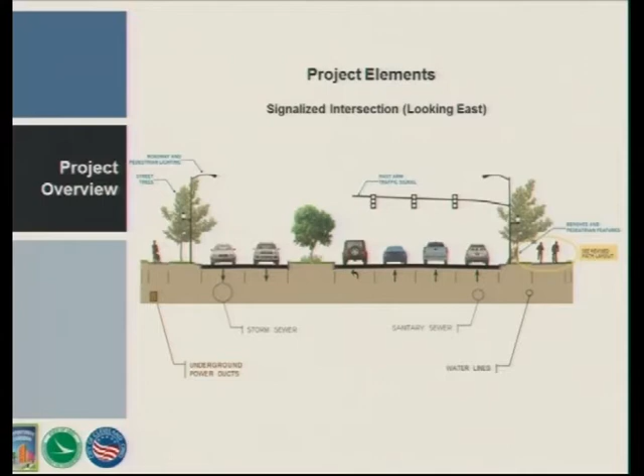So as we look at the road, it was mentioned as some people view it as an extension of the freeway system. As we've always stated, it is not a freeway. It is an at-grade boulevard, so it has traffic lights at intersections, vehicle lanes, sidewalks, bike facilities, grass median, tree lawns, street trees, and lighting. Underground, the roadway is also making accommodations for underground power distribution systems, storm sewers, sanitary sewers, and water lines, all the things that will be necessary to support the redevelopment.

A recent change, there's been a lot of talk about that bike facility. The project started with bike lanes. It eventually shifted to an off-street, shared-use, multi-purpose trail, and then it's been refined within the last month to be a segregated bike and pedestrian path where they're separate from the roadway and still remaining separate for safety. There will be 2 bike lanes on the south side of the road adjacent to a sidewalk, so pedestrians and bicycles don't share the same facility, but they're now adjacent.

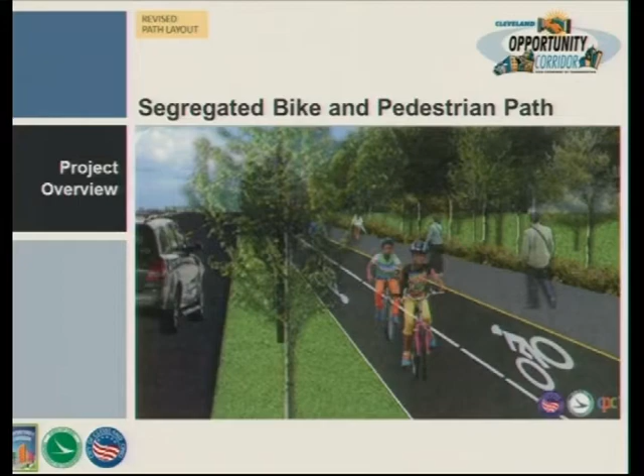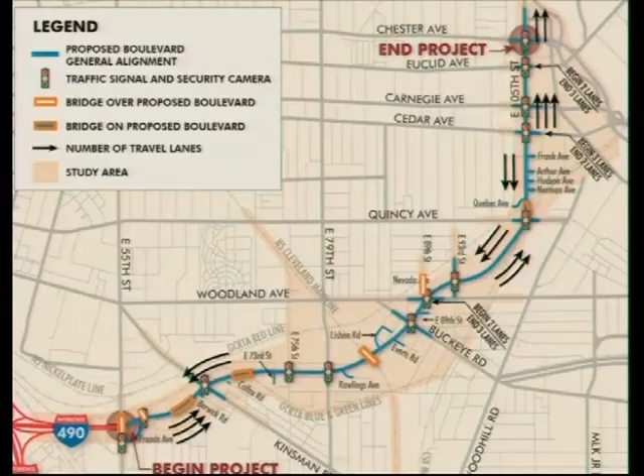This is a rough look at the alignment of the road, starting at the left. At the bottom is where 490 intersects with East 55th Street. The project traverses in a northeasterly direction, as mentioned, until you hit 105th Street and Quincy, and then it reconstructs and improves 105th Street all the way up to just north of Chester. There are 13 traffic signals that provide access into the neighborhoods, and there are 8 bridges. So when you hear bridges, you think, oh, it's all elevated, it's grade separated. That is not the case. 6 of those bridges are actually where the road crosses railroads, so a lot of it is separating the railroads from the cars and the bikes. At the west end of the project is the only place where there are roadway separations, and that's at East 55th Street.

Taking a look at East 55th Street, it will stay right at the same elevation it is today. Where I-490 comes in, it will be lowered, converted from what looks like a freeway into a boulevard, introducing medians and trees. It'll go underneath East 55th Street, with a traffic signal and access roadway providing access back to East 55th Street.

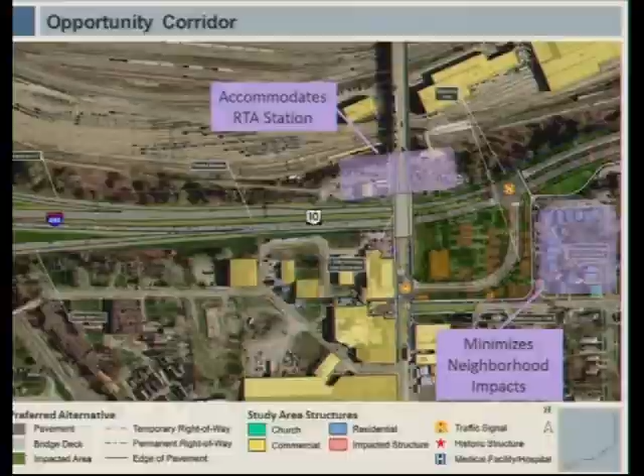This is because at the west end of the project we have very high traffic volumes, all the traffic coming off of 490 at 55th Street. In order to safely accommodate that traffic as well as pedestrian crossings going to the train station, we grade separated this location. There's also a pedestrian bridge right in this vicinity, providing direct access to the train station.

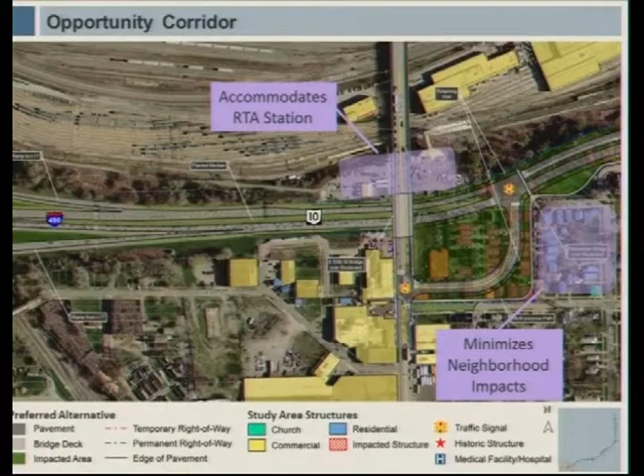Our primary constraints here are making sure we could accommodate RTA, not impact their substation or their new train station at 55th Street, while trying to minimize all the impacts in the St. Hyacinth neighborhood of Slavic Village.

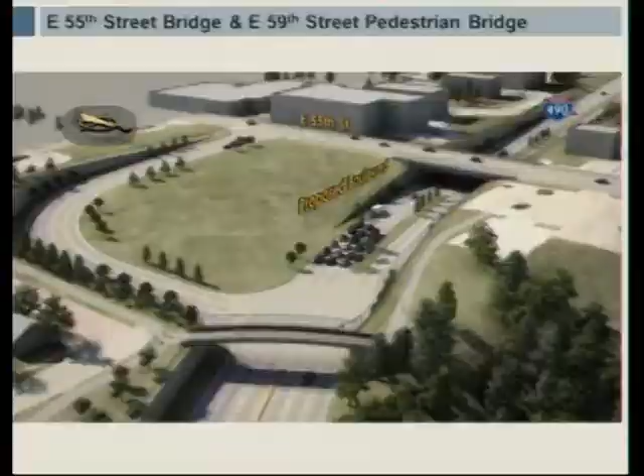This is a 3D rendering looking west, showing 490 depressing below 55th Street, and the access roadway that starts at 55th Street and wraps down, as well as the pedestrian bridge. Don't picture a pedestrian bridge elevated up in the sky going over—the pedestrian bridge is at neighborhood level and the roadway is actually below grade.

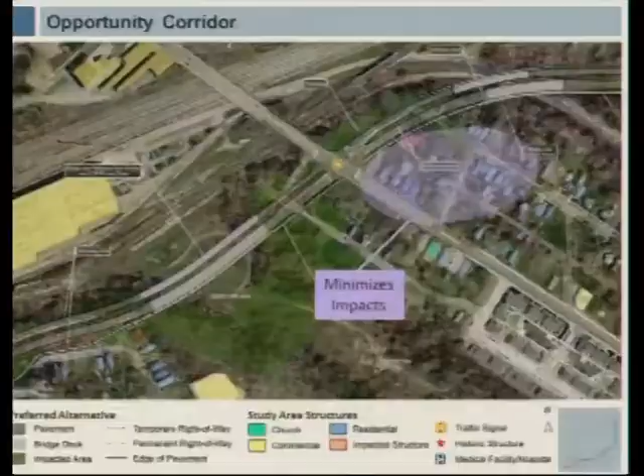Going east from there, you'll see our second set of bridges—about a 600-foot long bridge crossing of the Kingsbury Run Valley, about a 50-foot deep ravine. It presently prevents pedestrians, cyclists, or vehicles from moving through this area, so a new bridge is constructed there, along with a signalized intersection at Kinsman Road.

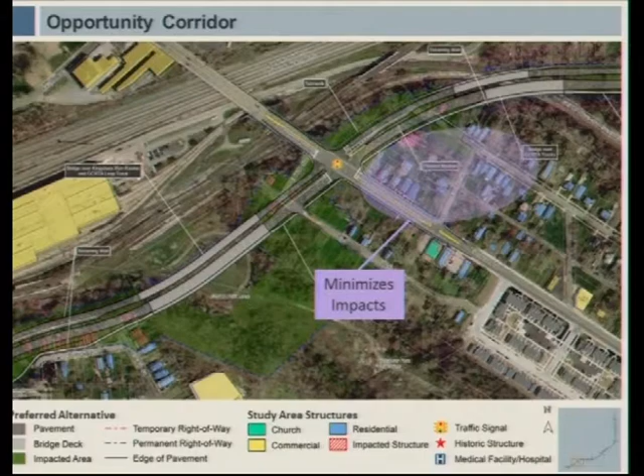Kinsman gets widened from 4 lanes to 5 lanes to provide a left turn lane onto the boulevard. Then we proceed east with another pair of bridges over the RTA blue-green lines, another barrier that prevents pedestrians, cars, and bicyclists in the area today. Our desire here was to keep the road as close to the tracks as possible to minimize impacts in the central neighborhood, the Kinsman neighborhood.

Moving east, you'll see a new signalized intersection at East 75th Street, and another at East 79th Street. To the north, the big yellow building is Orlando Baking Company. The alignment of the road has been coordinated to facilitate a multi-phase expansion of their property, as well as accommodations for the brownfield redevelopment area south of the boulevard.

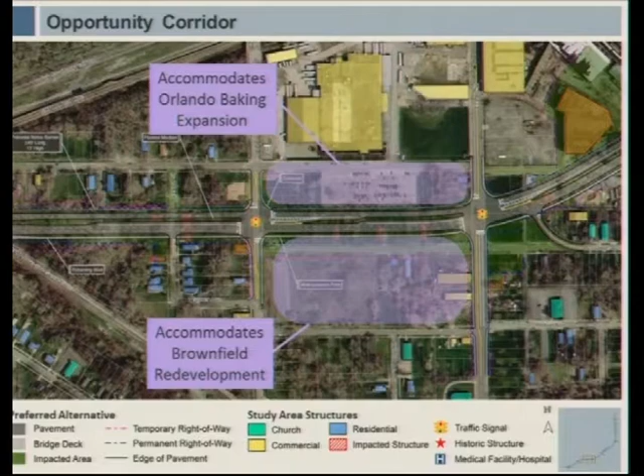East of 79th Street, we have another structure—this time a railroad bridge that will go over top of the boulevard. We have to build a road under a train line that accommodates about 80 trains a day, so we have 3 different phases of train maintenance in order to maintain train traffic the whole time while building a new bridge. Another one of those driving expenses of the project.

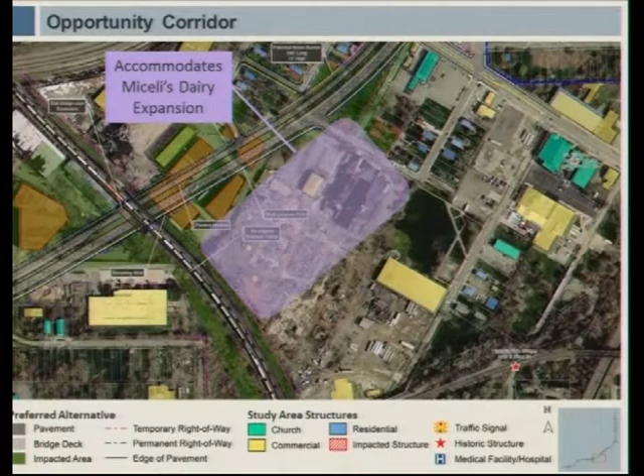At this location, just east of Norfolk Southern's tracks, is Miceli's Dairy. They're presently located here and have expanded here, but have additional expansion plans that'll push westward. The alignment of the roadway was coordinated to accommodate Miceli's.

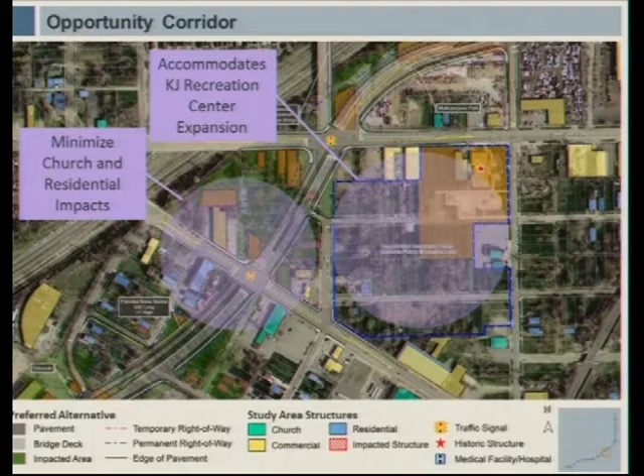We create a new signalized intersection at Buckeye Road and another at Woodland Avenue, again looking to minimize residential and church impacts through the corridor. When we started our study area, there were 27 churches within it. In the end, we've been able to avoid all but one small storefront church that required a relocation.

A lot of coordination went on at Woodland Avenue. We had options that created some discontinuity of Woodland, but that was opposed by the public, so we came up with an alignment that both keeps Woodland continuous as well as accommodates a rather large expansion of the Ken Johnson Rec Center.

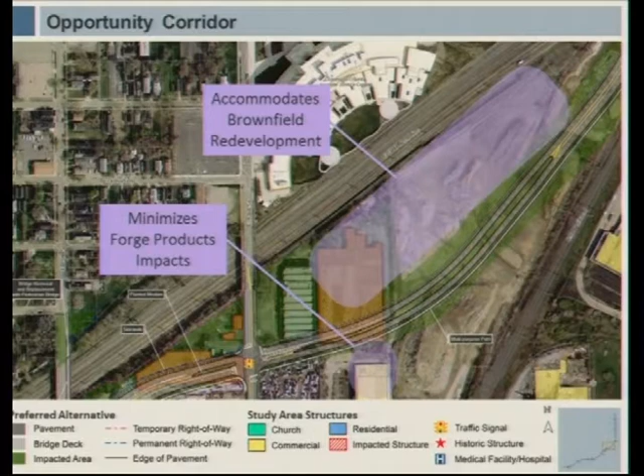East from there, we create a new signalized intersection at East 93rd Street, which provides access. You'll see the big white building to the north—that's the Cuyahoga County Juvenile Justice Center. Going east from there, we avoid impacts to Forge Products and also accommodate more of the brownfield redevelopment areas.

As we hit the 105th Street corridor, I've shifted north on you—north is now going to the right. This is 105th Street you see in the middle of the road. You have railroads up top and railroads down below, and a roadway that has to fit in between them.

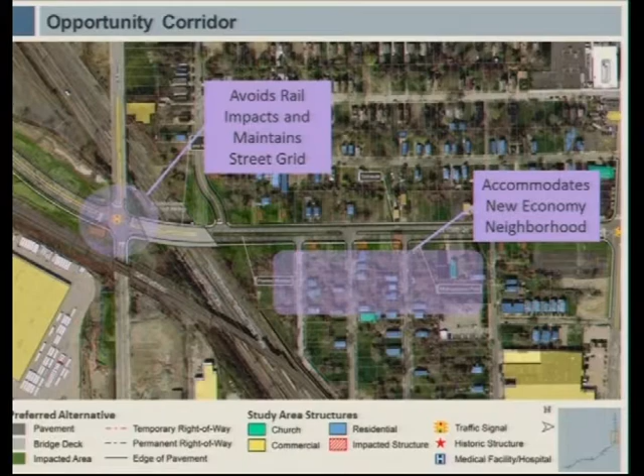A lot of coordination, a very constrained area, but we're able to maintain Quincy with its continuous through movement along with the new boulevard coming through. So we're avoiding impacts to the street grid through there, while also accommodating the redevelopment of a large tract in the Fairfax neighborhood known as the New Economy neighborhood.

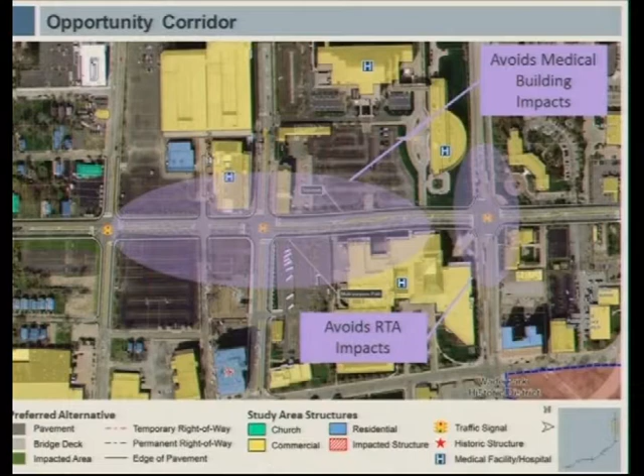We're avoiding impacts to the RTA investment at Euclid Avenue. And then when we get to Chester and 105th, you enter the Wade Park Historic District, shaded in orange. So the alignment shifts there, and we widen away from it to minimize impacts.

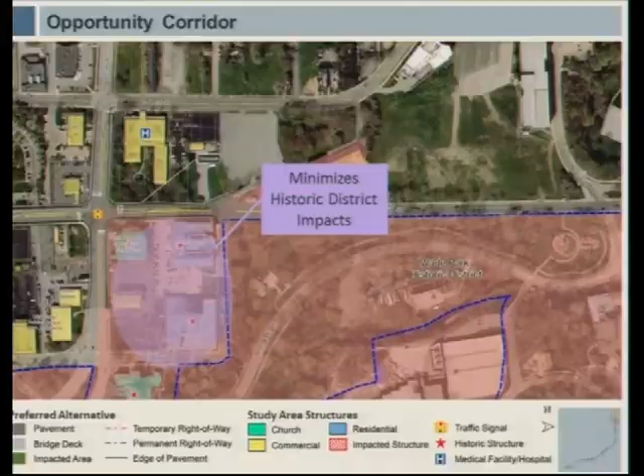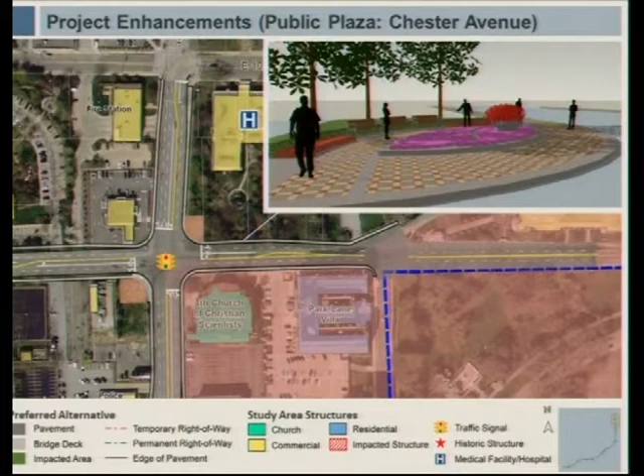Looking at some of the other design features of the roadway, there are a lot of enhancements and improvements that have gone into it. Again, this is still up at 105th and Chester. At various intersections along the corridor, we're going to be creating small public plazas. These are opportunities for street furniture and other amenities. Some examples of what will go into those public plazas are furniture, pavers, landscaping, public art, and opportunities for neighborhood identity.

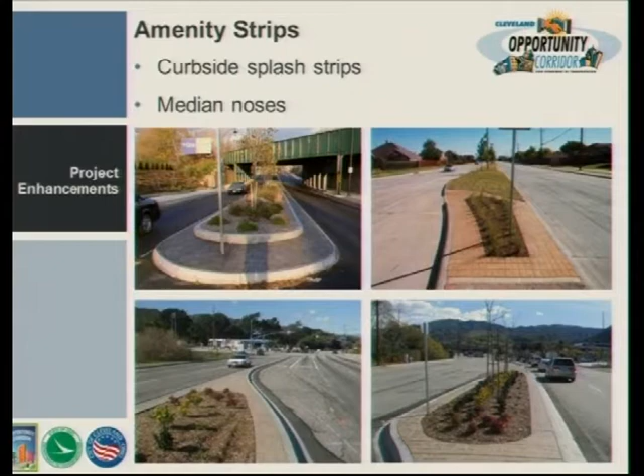Looking at the medians and along the edges of the road, we're using some amenity strips. These are areas where the salt tends to kill the grass, so we can pretty those up with amenity strips and landscaping.

The corridor will use high efficiency LED light fixtures, spaced about every 150 feet along the road. These are very compact, visually pleasing fixtures, also with underground power circuitry feeding everything, so you won't have all the overhead wiring. On the poles, it also creates more opportunity for neighborhood and other identities through banners.

The light poles, in conjunction with that, all the street planting for the corridor is coordinated. Everything will be new, so we're looking at a very dense tree planting program within the medians and the tree lawns.

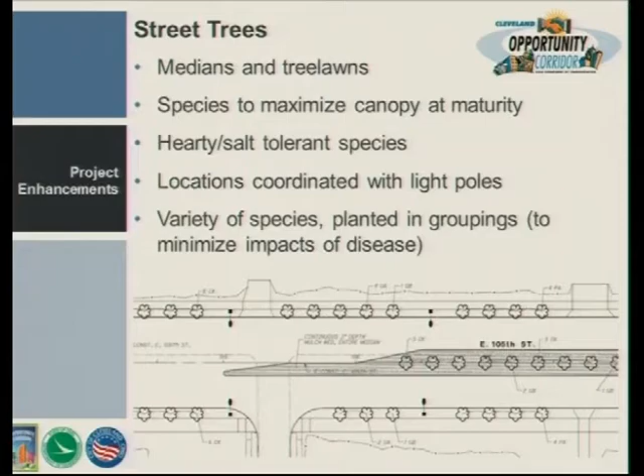We're selecting trees through coordination with the steering committee. The desire was to reduce the greenhouse impact and plant trees that will end up with a mature canopy when they grow. Also looking at hardy, salt-tolerant species, coordinating everything with the light poles, and using a variety of species so the next time some disease comes through, it doesn't wipe out the whole corridor. These are just some examples of the types of trees and species that would be planted along the corridor.

And we're working with RTA. The project will fund the construction of enhanced bus shelters at locations desired by RTA.

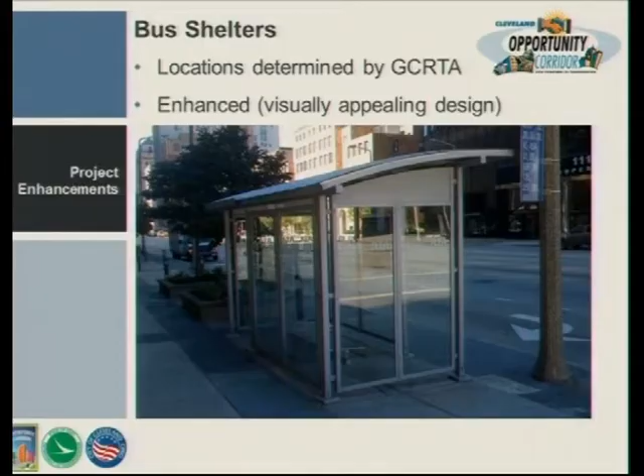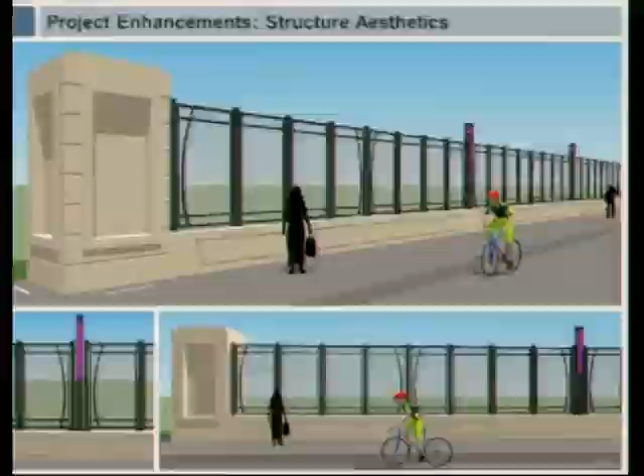And then we're looking at enhancements of the bridges, again creating aesthetically pleasing structures. This one shows a pylon on the corner with more opportunity for neighborhood identity, as well as some custom railings and LED light fixtures for amenities.

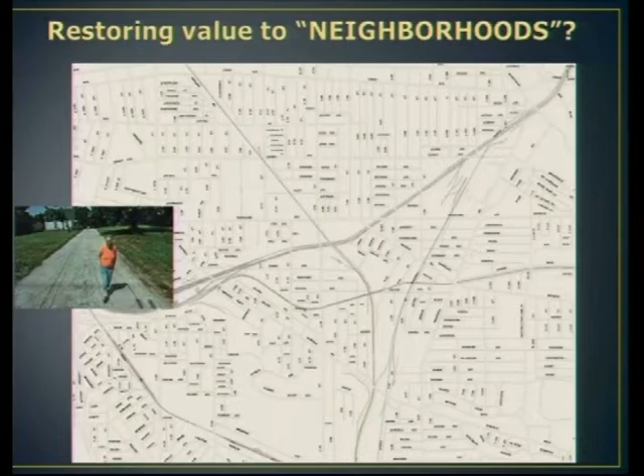So this image, many in here may be familiar with. When we first saw this image, this was a woman who actually lives in the Opportunity Corridor area. When you first see this image, you think this is sort of rural Alabama somewhere, but this is actually a section of Opportunity Corridor. So the question for us is really how do we begin to infuse the types of uses that give this woman and others in the community the opportunity to thrive.

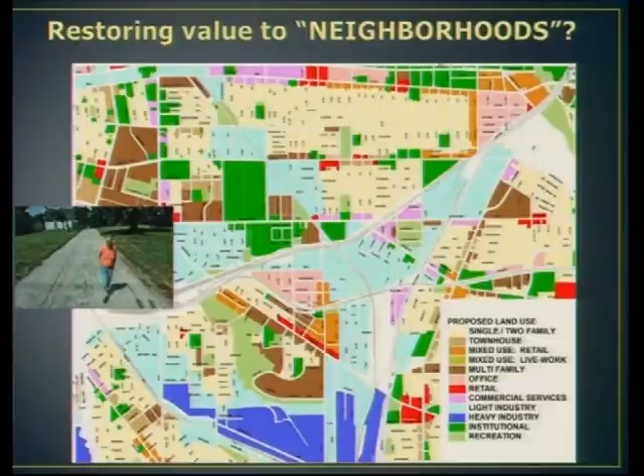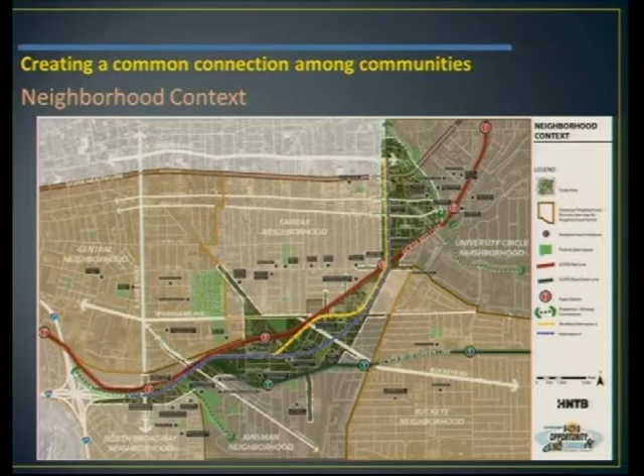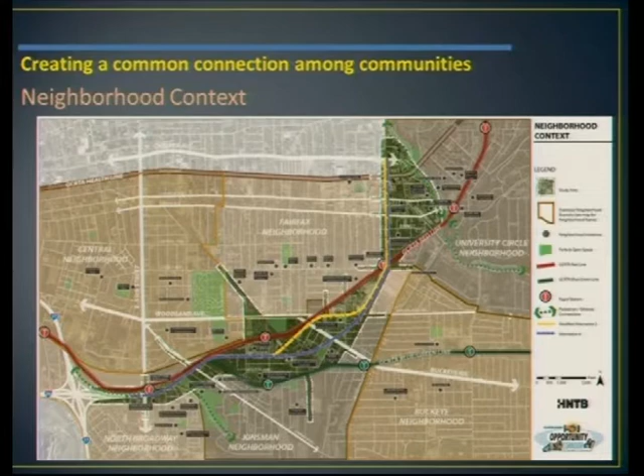The first thing that is very important to understand about this corridor is the fact that we're trying to create common connections among communities. When you look at this map, you can see the various neighborhoods that flank this corridor. Some neighborhoods are challenged in many ways, but the land resources that flank this corridor are really critical for the success of the corridor development and restoring value into neighborhoods.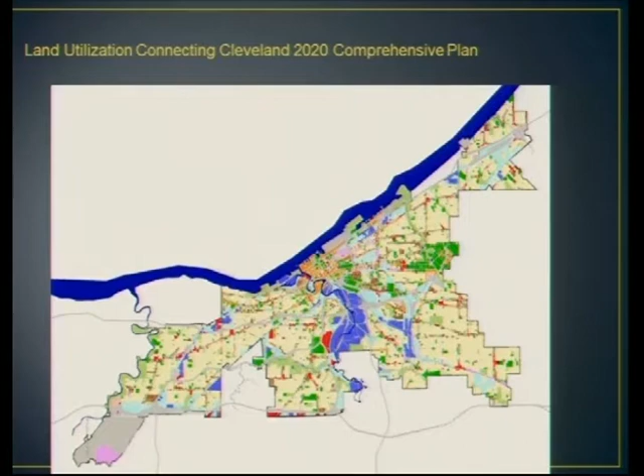So the Opportunity Corridor will act as a catalyst for economic development in the city of Cleveland and create vital connections to the greater region. This map is an example of the Connecting Cleveland 2020 citywide plan. At the time when we produced this map, it showed all the existing land uses in the city. Our desire was really to begin to focus on how do we create job opportunities, higher density development, and the type of walkable neighborhoods that many people want to see in the 21st century.

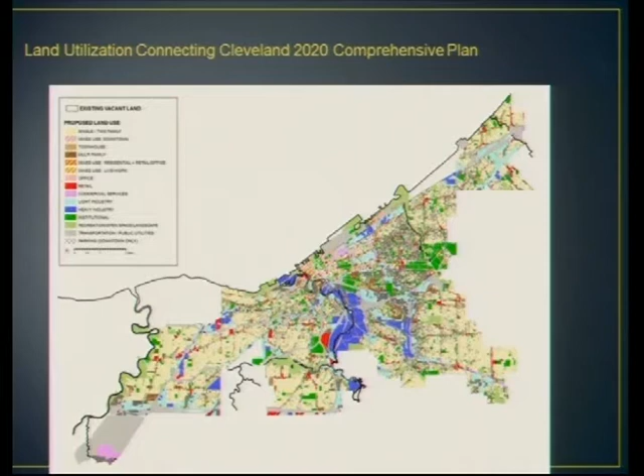But when you look at this map, one of the impediments to that vision is what you see in gray, which is a large agglomeration of vacant land. Here in this area, formerly known as the Forgotten Triangle, it hosts most of, if not a great deal of, the vacant land in the city of Cleveland. So how do we capitalize on that?

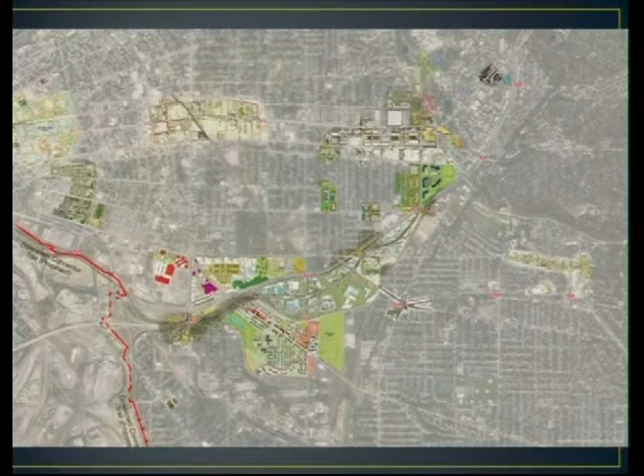One of the things we're doing to really drive decision-making is looking at community voice as a critical part of this. What you see here is a map that shows a series of neighborhood plans knitted together on one map. This map actually helps to inform our land use strategy.

Part of what we do is take that land use strategy and start to formulate our land use plan. So I want to highlight a couple of areas when you start to break this up and target certain zones within the Opportunity Corridor. This area outlined in red is really what we're focusing on as sort of the core job zone.

East 79th Street corridor is going to be a very critical piece of the puzzle because that is one of the north-south corridors that connects to the corridor and actually links you to the actual neighborhoods that flank it.

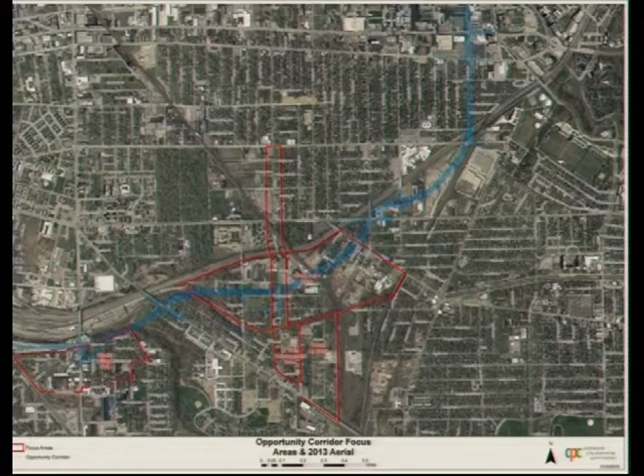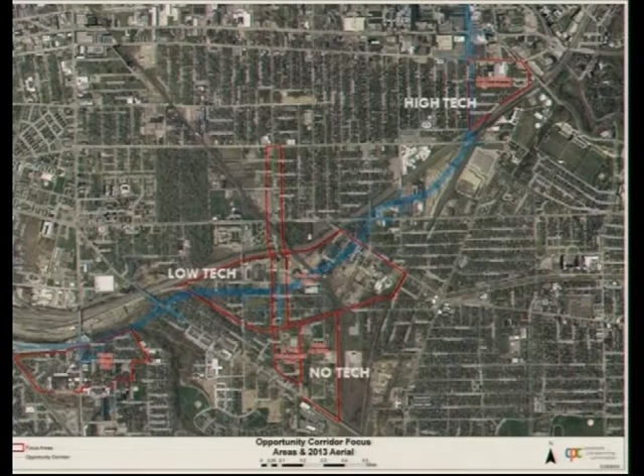Also, the urban ag zone, really taking advantage of the opportunities associated with the innovation going on in that area. And also focusing on transit-oriented development opportunities around the rapid stations. One example is the Slavic Village TOD area, really taking advantage of the New Economy neighborhood just south of University Circle. So the idea is to create high-tech, low-tech, and no-tech opportunity when it comes to job creation.

The well-designed multimodal public infrastructure will leverage private investment and infuse the corridor area with new jobs for existing and future residents. One of the goals of the city's comprehensive plan, Connecting Cleveland 2020, is to increase economic prosperity through job creation and improve access to jobs and business ownership by all segments of the community.

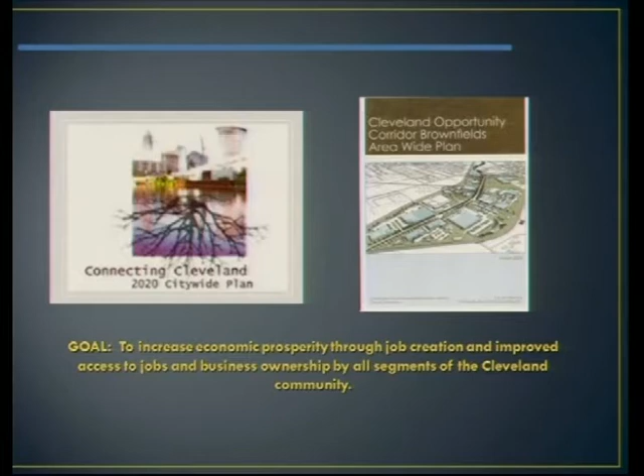It was alluded to earlier about our work with City Architecture, the US EPA, regarding the Cleveland Brownfield area-wide plan, where we really begin to target areas within the corridor vicinity, particularly that core job zone area, for looking at where we can target land remediation efforts to create the type of job sites that could be leveraged as a result of the planning and development activity in this corridor.

From a jobs perspective, just to give you some positive trends happening citywide, there's been a 25% increase in STEM employment in Cleveland since 2003. This has helped raise per capita income by about 34%. So how can we create job opportunities that leverage that type of STEM education and employment?

Also, between 2011 and 2012 alone, there was an 11% increase in residents between the ages of 25 and 34 years old with at least a bachelor's degree, half of whom moved to the city of Cleveland from other states. So there's a brain gain in many cases, and if we can leverage high-tech opportunities along this corridor, we can create a mix of employment opportunities for a diverse set of residents, particularly those who live in the actual neighborhoods.

Just to give you an example of some immediate things that are happening on the job front, the City of Cleveland workforce in the corridor area has really focused on job creation for existing residents today, even before the roadway is built. To date, there's been 91 total job placements from November 2014 through April 2015.

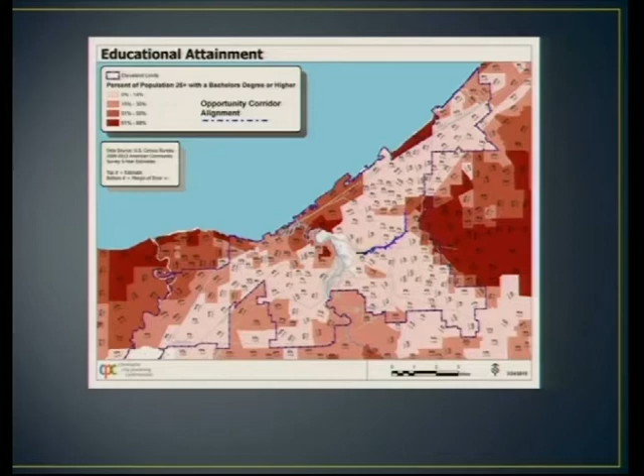Just to give you some statistical information from a place-based standpoint, this is educational attainment. This map shows the percent of population 25 and over with at least a bachelor's degree or higher. If you notice, the area in the light pink represents the lowest number, and you can see the purple line there where the Opportunity Corridor exists.

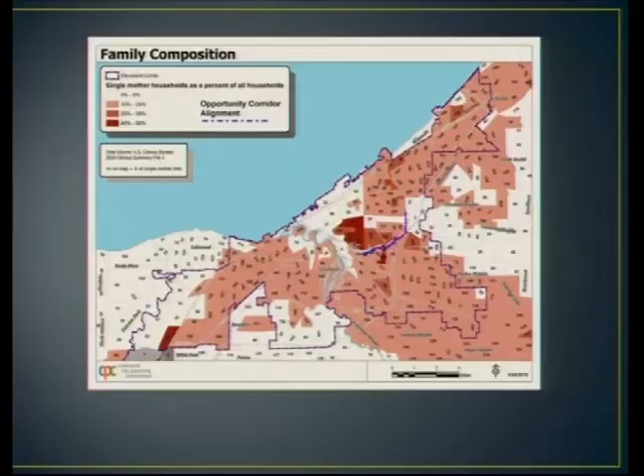The other aspect you may notice in this particular map is family composition, where you see single mother households as a percent of all households. So you have a lot of single parent, low income residents in this vicinity represented by the dark red that's flanking that corridor, which makes the prospect for being deliberate about job creation and doing it at all levels that much more relevant.

So the idea that we're trying to focus on at the city and working with our partners is the notion of viewing the development of people as a capital investment. If we can invest $331 million in a roadway and expect a long-term return, we can also invest in people and expect a return as well. So this has been a really key focus.

Working with community colleges, local schools, and colleges and universities are going to be critical in that, and I'll expound on the community college connection. So to do this, we have to begin to create these education partnerships, working with the faith-based community, the business community, government, basically all hands on deck to really create long-term opportunities for students in the CMSD who are seniors, as well as take residents in the community and connect them to the type of educational and training needs in order to create the economic potential for them.

Just a couple examples: Tri-C offers courses in healthcare, logistics and distribution, as well as manufacturing. Now, many of our four-year colleges and universities do not offer that type of hands-on skill set, so our community colleges are going to be very critical in this.

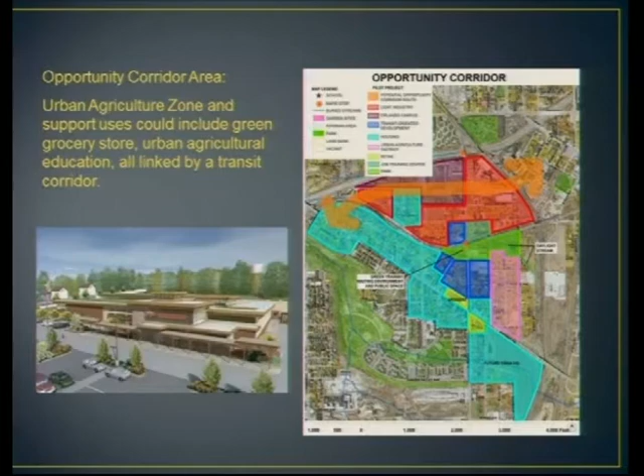And also the resulting development initiatives that promote sustainable land uses and healthy communities when we talk about the area that exists within the Opportunity Corridor. We think about areas like the urban ag zone—how can we begin to leverage the production of food in that area and really start to get into more of the distribution side of things, providing opportunities for things like a green grocery store, et cetera. Also looking at green infrastructure as a key opportunity to take full advantage of vacant land and utilize land resources as a form of stormwater management, et cetera.

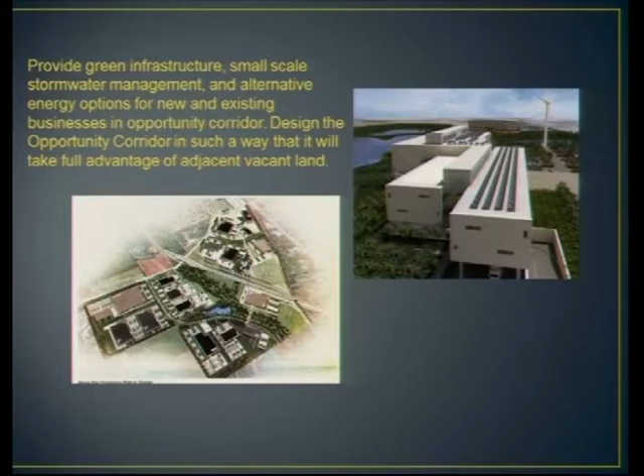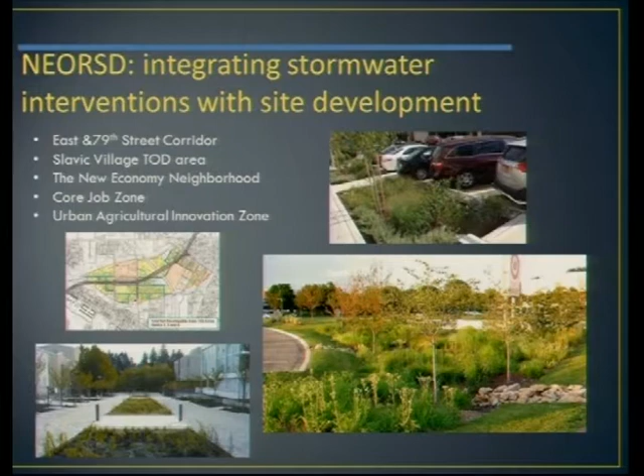These are some examples of these types of interventions. We're working right now with the Northeast Ohio Regional Sewer District and looking at an integrated stormwater management approach. From a city perspective, we're also looking at innovations around zoning—how do you regulate land to ensure that you get the type of development that you want to see in these areas?

We are in the process of now passing legislation to establish the Opportunity Corridor Design Review District. This will give us the opportunity to govern the design of buildings as they actually develop within the corridor area, giving us discretion to influence the built form and aesthetic treatments along the corridor route.

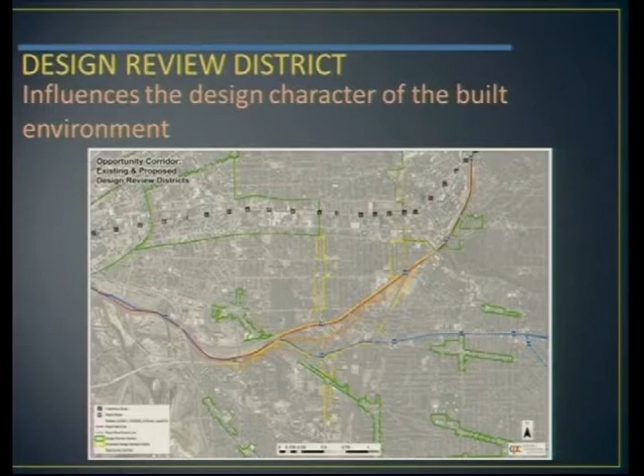This is the area outlined in yellow of that design review district, which covers all the parcels that flank the corridor. One other thing I want to highlight is that we are also looking at these north-south spines that come from the corridor into the neighborhood.

East 105th Street is one of those areas, and we were awarded last year a TIGER grant for $494,000, including funding from NOACA as well as the federal government, to study the corridor of 105th and East 93rd Street, linking up with Opportunity Corridor as a critical north-south connection route.

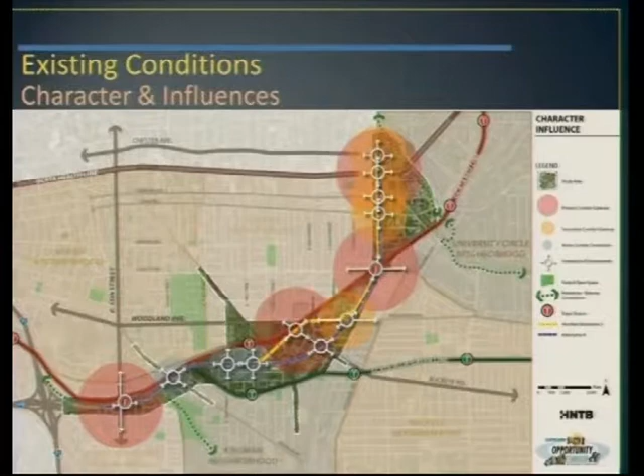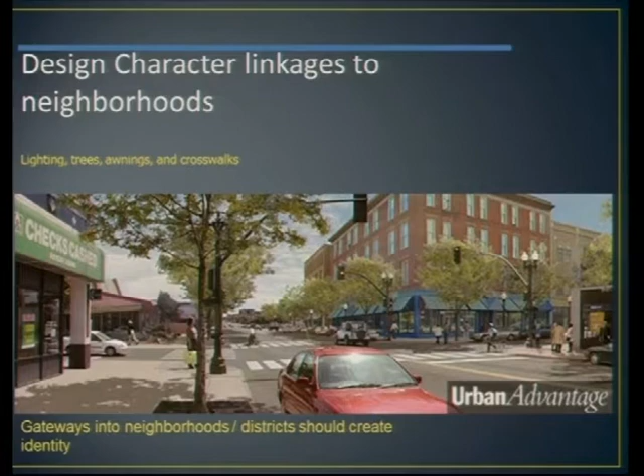We're also looking at T intersections and how to treat intersections to promote walkability, looking at the center and edges of those communities and what's happening in a five-minute walking radius of key intersections. We're really trying to take typical intersections and create density, building up instead of out, focusing on tree canopy, as Matt alluded to, and creating places in key areas along the corridor.

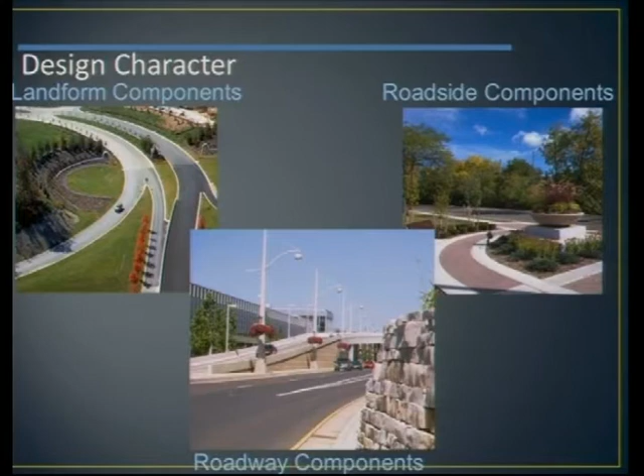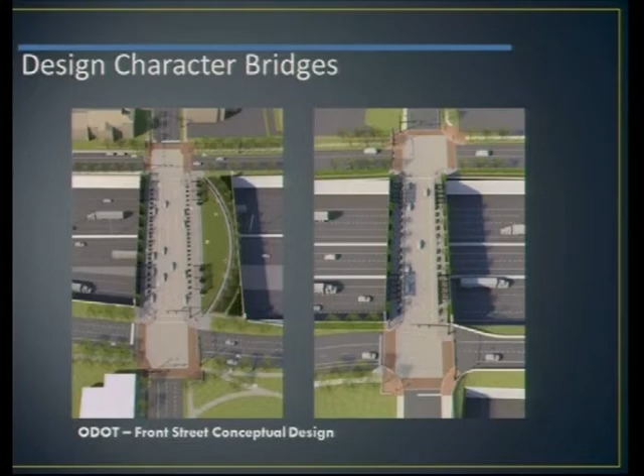Some of the design characteristics, as far as landforms, and Matt alluded to plazas — these are all things we've been coordinating on. We also looked at bridge characteristics, and we were very instrumental in working with the partnership as well as HNTB and ODOT on identifying opportunities for the bridge design that you saw.

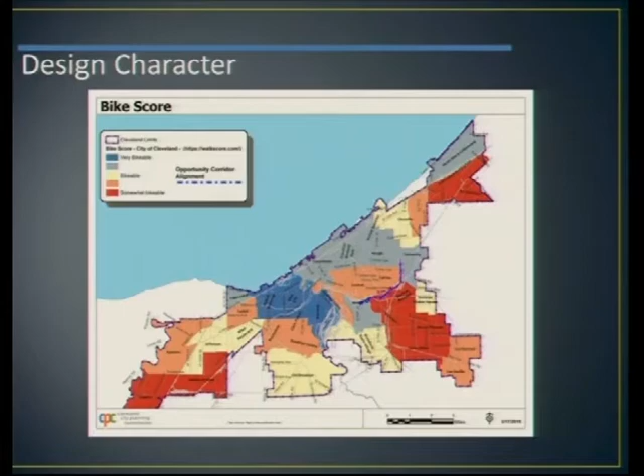I also wanted to reiterate that when we talk about bicycle and pedestrian amenities, this map shows bike score, and you can see communities considered more bikeable and less bikeable. The area around the corridor is a less bikeable area that does not have good connections.

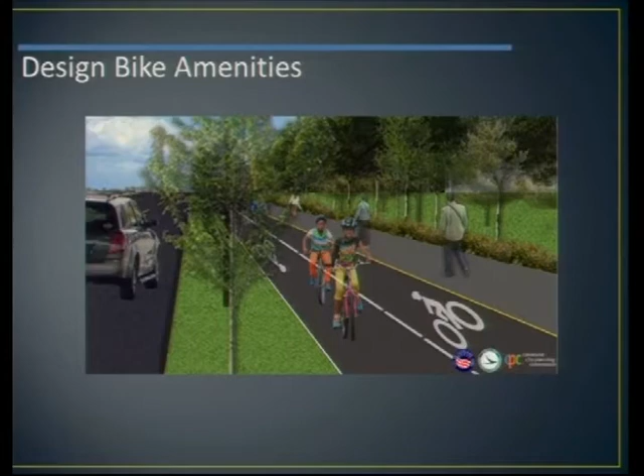We are also looking at transit-oriented development, particularly at East 55th and East 79th Street.

And lastly, the planning process was extremely critical in this. Much of what the neighborhood talked about during this process was the beautification of the neighborhood, street improvements, repurposing vacant parcels, public safety, enhanced access to public transit, jobs and employment opportunities, as well as economic development.

So for us, in a nutshell, this is what has driven the city of Cleveland's investment of time and energy into the corridor. So I'm going to turn it over to the MC, and he is going to turn it over to Marie. Thank you.

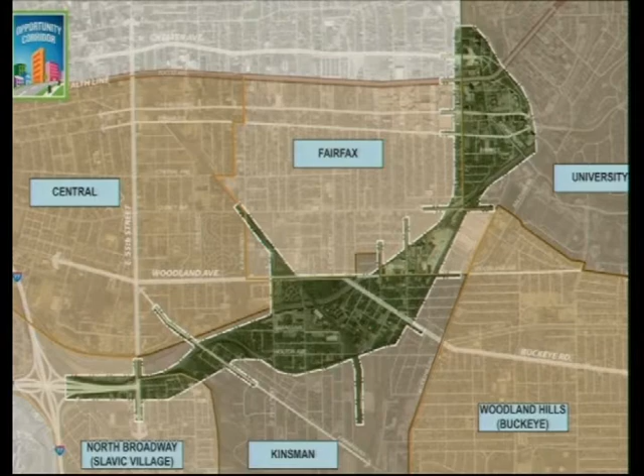Just quickly, you've seen a lot of maps, but I wanted to highlight where the particular neighborhoods were. Central and Kinsman are serviced by Burten Bell Carr Community Development Corporation, along with the Hyacinth neighborhood, North Broadway, Fairfax, Woodland, and University.

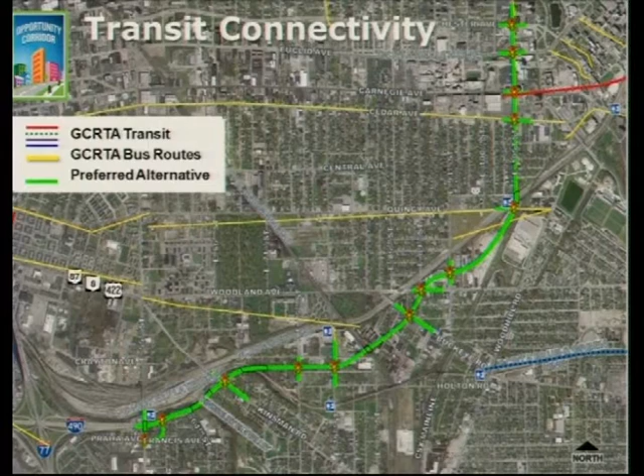Quickly, we didn't really mention this—transit connectivity is one of our big competitive advantages. As Joe Calabrese says, Opportunity Corridor is a game changer, and that's what we're building off of when we talk about economic development.

I'll skip that slide since we're in a hurry. The plans Freddie mentioned are being linked together to highlight each of these unique neighborhoods and their history, like the African American history at Karamu House and the urban ag zone

in Kinsman. I'm dashing through here, but you have the urban ag zone and Burten Bell Carr, who were really on the leading edge of figuring out how to deal with all our vacant land and use it effectively. Their work bringing agriculture to that disinvestment in the Forgotten Triangle was critical.

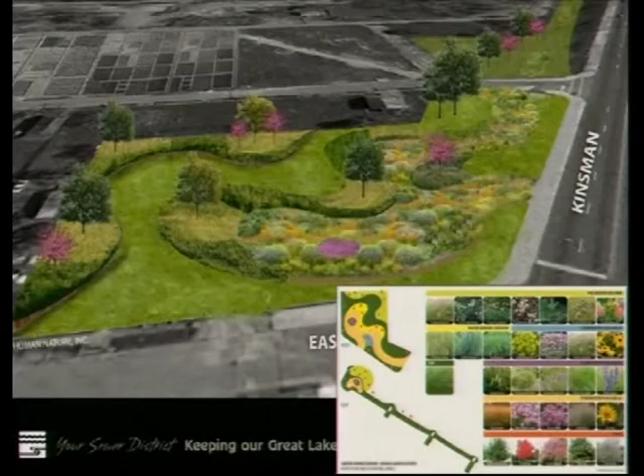The Sewer District added on to that, as Freddie briefly talked about. This is the kind of development happening right now—it's actually under construction, layering on the urban ag zones.

Okay, I think I'm done. Let me—actually, I'm not done. Sorry.

Let me just end with this. And I was talking about the urban ag zone because that's a major development strategy to bring in food processing and packaging, and there's a lot to build on there.

But here's the core question for all of us who are working on the project, and that is: opportunity for who?

Residents are worried, and we've heard from them. The whole team has heard from them. They're worried they're going to be shut out of decision making. They're worried that this project is going to make their neighborhood, themselves or their neighbors, worse off, that they're going to be left out of the economic gains, and that it's going to negatively impact Cleveland.

And so our responsibility is to answer those questions, and answer them up front, and that's why I want to make sure I didn't leave without mentioning that. That's why the jobs are important, that's why the design is important, and that's why we're here today. Thank you.